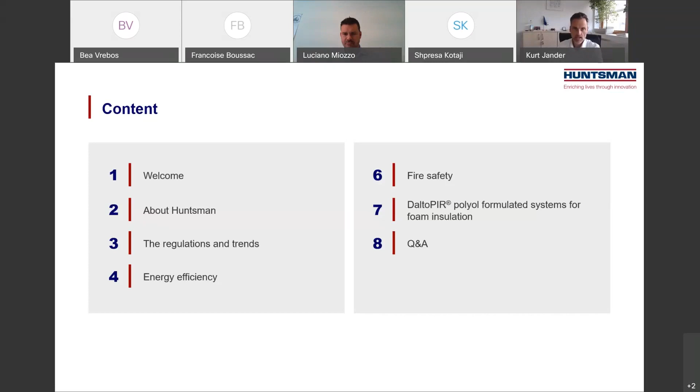Let's start with a brief introduction to Huntsman. Huntsman is an American company founded by Mr. John Huntsman about 50 years ago. Today, the Huntsman Corporation is a publicly traded global manufacturer and marketer of differentiated and specialty chemicals. Our products number in the thousands and are sold worldwide to manufacturers serving a broad and diverse range of consumer and industrial end markets.

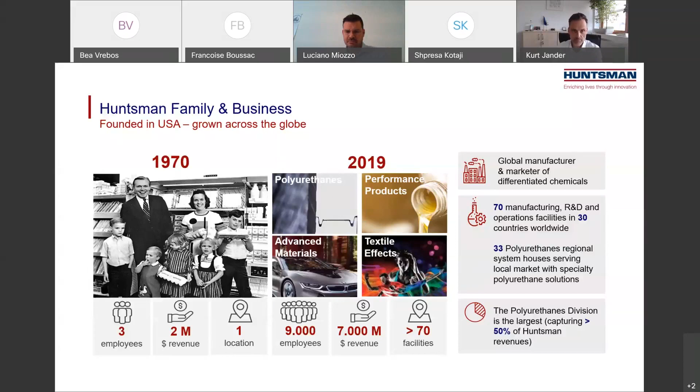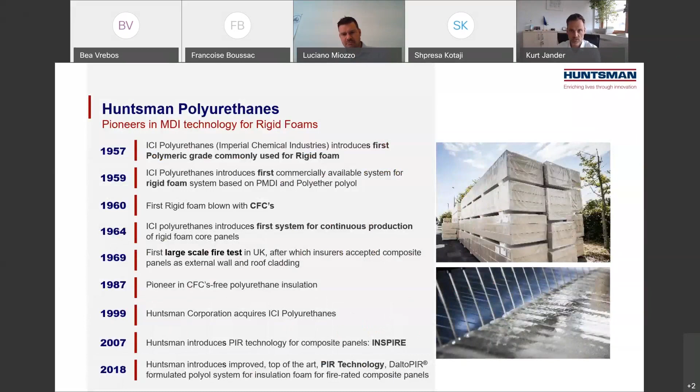ICI Polyurethanes, later acquired by Huntsman, was one of the first companies to introduce the technology used to produce rigid foam more than 60 years ago. We pioneered further with the right innovative blowing agents, and the first continuous system production was implemented. During the years, Huntsman continued to further develop the rigid continuous systems business and technology, both for fire properties, processing, as well as quality performance.

The objective of this webinar is twofold: to provide you with clear information and key trends in construction, in particular on energy efficiency and fire performance, and to support your growth in this complex environment. I now leave the floor to Diane Daems, Global Senior Fire Expert, who will tell you more about these key trends. Diane, over to you.

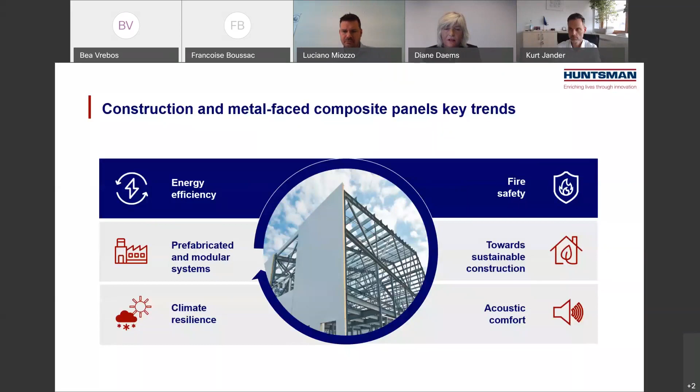Another key trend is the need to build with fire safety in mind. With the increasing use of insulation, preventing heat to escape, and the trend to build more densely to accommodate population growth, we need to make sure only adequate and safe building designs are promoted, and we will see how polyurethane composite panel performance can help. So, let's go in more detail on energy efficiency first.

Energy efficiency, why is it important? The timeline in this slide shows the milestones that have led to the growth of insulation demand. The trend towards very high energy efficiency in buildings started after the signature in 1997 already of the Kyoto Protocol, aimed at reducing the amount of greenhouse gases emitted by human activities. The European Union agreed to reduce our 1990 baseline emission level by 8% by 2012.

Secondly, in 2002, the European Union implemented its first version of the Energy Performance Building Directive, EPBD, that introduced the obligation to provide a building energy performance certificate and the obligation for member states to impose a minimum energy performance.

In 2010, the second revision of the Energy Performance Building Directive introduced the concept of nearly zero energy building, requiring member states to define the most optimal U-value per climate and per region, and the obligation for new public buildings to be nearly zero energy by end 2018, and for all new buildings by end 2020.

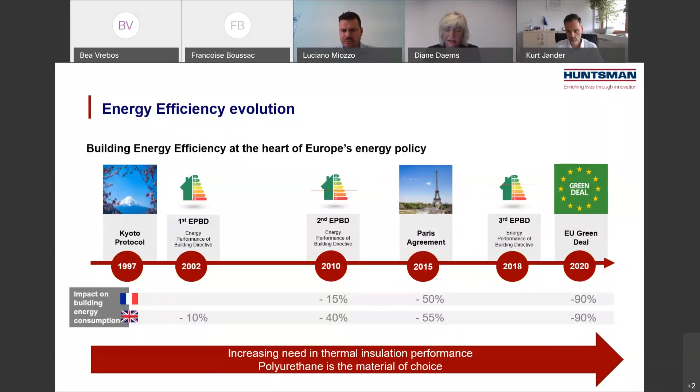The graphs here show the results to date of all these initiatives, both on the energy consumption as well as on the growth of insulation materials and PU insulation in particular. The building directive required improvements on the building energy efficiency to be implemented by the member states. The graph on the left shows the gradual reduction of building energy demand to achieve the nearly zero energy building requirement target by end of 2020 for all new buildings in three selected countries.

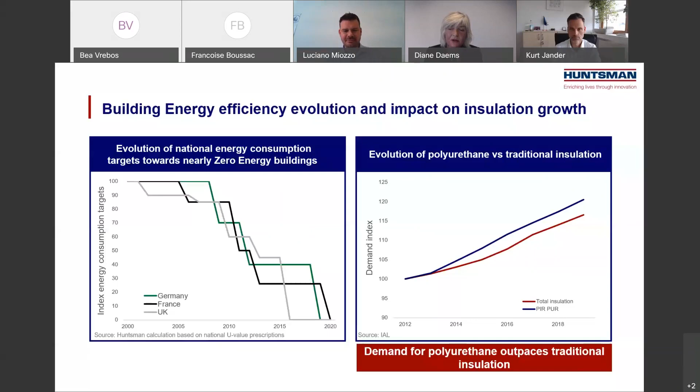On the right side, the graph shows that the reduction of building energy consumption was accompanied by an increase. A faster growth of PU insulation in general was seen, as shown by the blue line. This can be explained by the fact that due to its much lower thermal conductivity, or lambda value, compared to the conventional insulants, the same energy performance of the building could be achieved without significantly increasing the thickness of the insulation layer and therefore minimizing the need to adapt the construction detailing.

The lambda value of the chosen material has an impact on the thickness required to achieve a given U value. Here, when looking at the U value for roofs and walls in both these charts, as prescribed in Finland, Germany, Italy, for nearly zero energy performance, we can see the advantage that PU brings by almost halving the panel thickness. The white bar is PU with a lambda value of 0.022 compared to mineral wool, the brown bar with a lambda value of 0.041 watt per meter Kelvin.

For example, for roofs in the left graph, in Finland, where the U value requirement is 0.09, the required thickness is 76% higher for mineral wool than for PU. This in turn simplifies handling and eases the installation and fixing with the polyurethane panels.

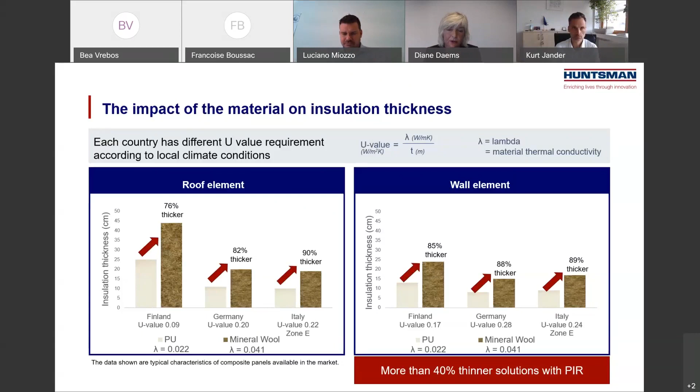So as a result, these thin, relatively lightweight composite panels can safely bridge wide spans. For example, a panel just 100 millimeters thick can easily bridge a clear span of some 6 meters, reducing the metallic structural element requirements. A study of PricewaterhouseCoopers showed that in a reference building of a standalone retail with a gross area of about 2,300 square meters, up to 10% less steel is required to support the roof and the walls. At the same time, the overall cost of the steel, panels, and insulation is also reduced by 10% when using PU.

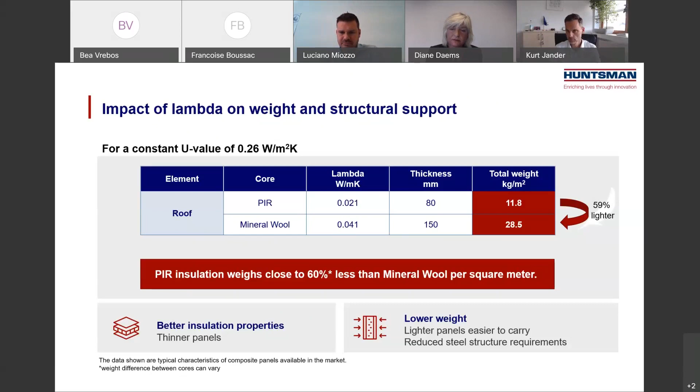Let's now go in more detail on fire regulations and requirements. And now here comes the poll question to you. So please use the panel on the right side to answer. I will read out the question. Which classifications can increase confidence with architects and designers to use new PIR composite panels with high fire-rated applications? Please tick all that apply. You have 20 seconds to answer, and then we will look at the results. So I wish you good luck with the answers, and in the meanwhile, I will continue with the introduction to the fire part.

Fire codes are an integral part of the national building codes, which are reviewed more regularly than historically to accommodate the changing building practices. And why are building practices changing more? This occurs because of several reasons, but the key one is the stepwise energy efficiency regulations and the move to a carbon neutral economy by 2050, which we showed before. The change in building and fire codes follows this timeline as well, but strong effects are expected to occur in the next 5 to 10 years in external wall and roof insulated building solutions as new standards and requirements appear in the European Union and in the member states.

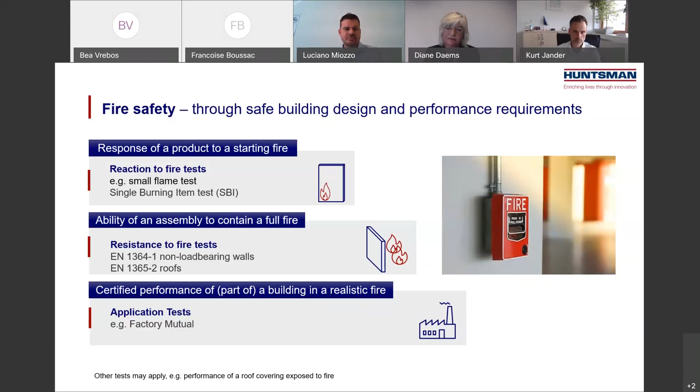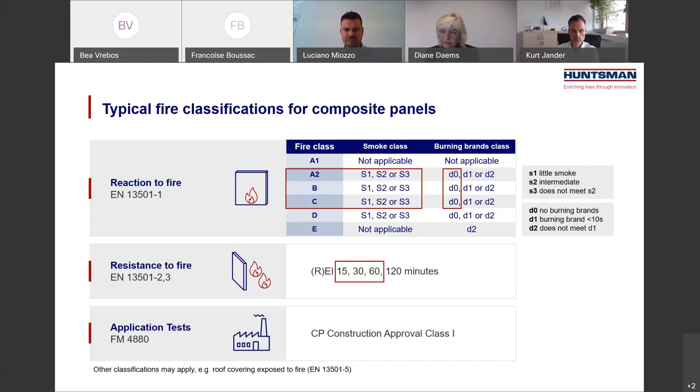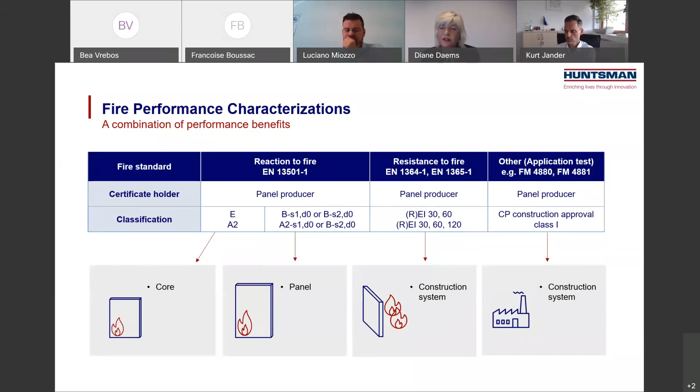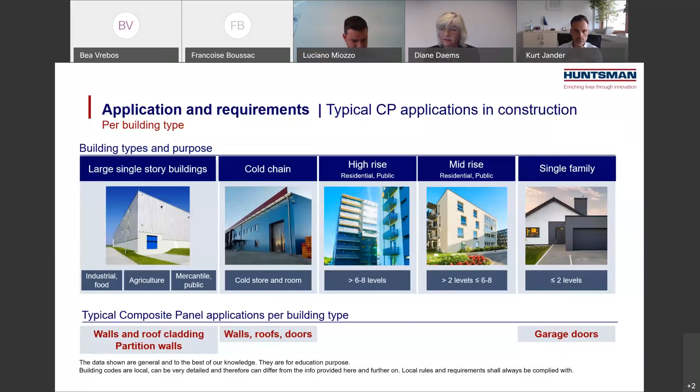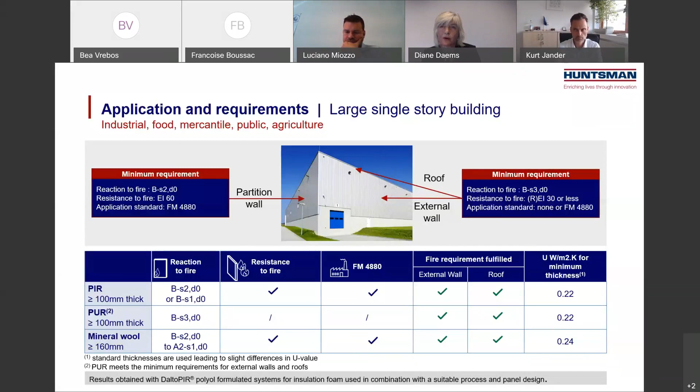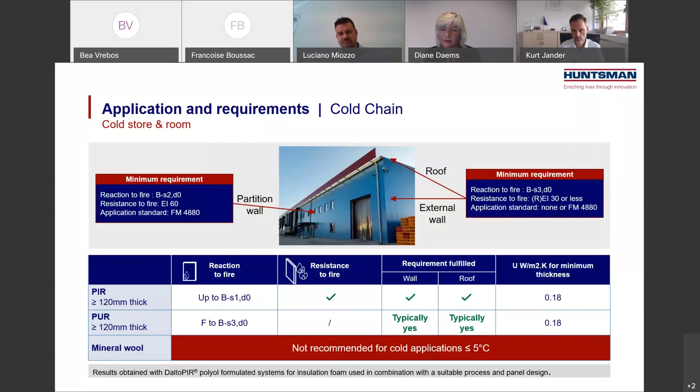Here ends the session on the trends in energy efficiency and fire safety. I will now hand over to Luciano, Platform Manager Insulation at Huntsman, for the final part of the presentation.

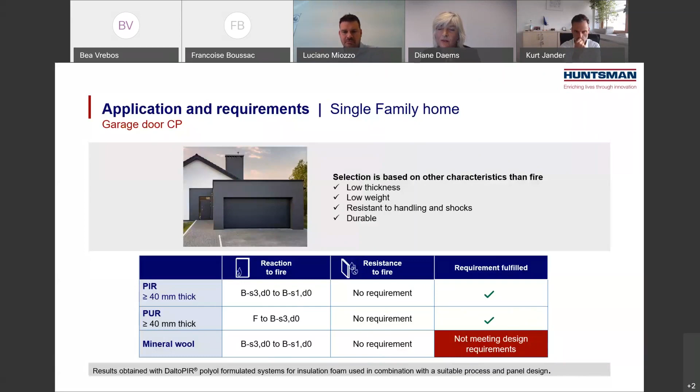So at Huntsman, because our aim is to contribute to the best solutions, we have developed a full range of solutions to meet the market needs. DaltoPUR and DaltoPIR are formulated polyol systems to produce a wide range of PUR- and PIR-based fire-rated foams, respectively, for composite panels. With a full range of products, we offer a solid solution for most requirements.

Our offer of DaltoPUR and DaltoPIR formulated polyol systems can cover the needs of composite panel producers for both non-fire-rated and fire-rated products. To achieve fire-rated composite panels, we developed over time several products, differentiated in terms of reaction to fire and fire resistance. Among all our formulated polyol systems, the one developed to produce PIR composite panels can help manufacturers to achieve the B classification for reaction to fire when combined with suitable process and panel design, which is the highest achievable classification with polyurethane-based products. The products are shown in this table here.

Starting from the left to the right, both DaltoPUR FR and DaltoPIR FR+ can enable our customers to produce fire-rated composite panels. Those formulations have been developed to work on laminators running at low temperature, namely 40 and 45 degrees Celsius, respectively. This temperature is identical or very close to the one used for PUR non-fire-rated composite panels. So the use of DaltoPUR FR and DaltoPIR FR+ can allow a faster switch from the production of non-fire-rated composite panels to the production of fire-rated composite panels. DaltoPUR FR can help manufacturers to achieve a minimum Cs3d0 classification for reaction to fire, as reported in the table.

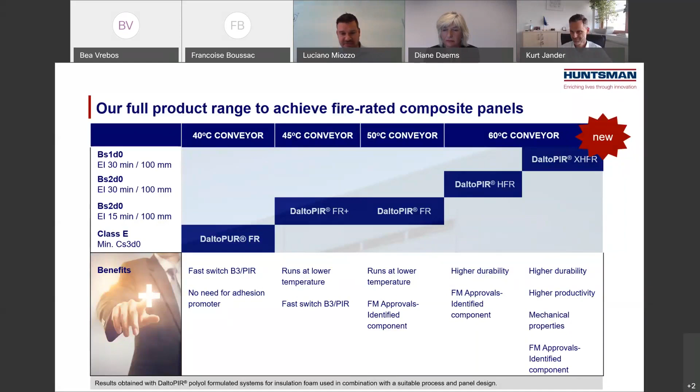So DaltoPIR formulated polyol systems for insulation foams have been optimized to help manufacturers to meet stringent international fire safety requirements and to satisfy the needs of composite panel producers, architects, and building promoters worldwide. Composite panels based on PIR technology combine, first, energy efficiency, second, lightweight, and third, ease of installation with fire safety performance.

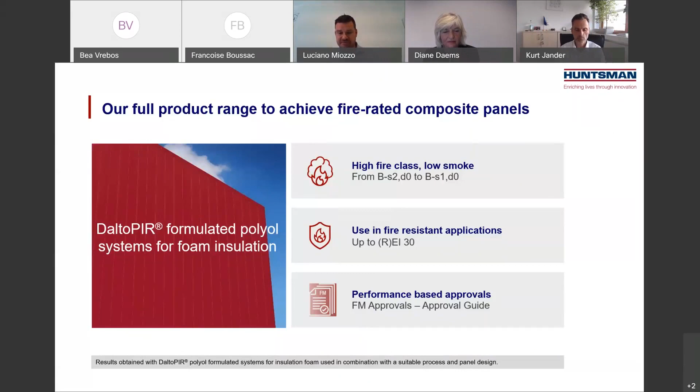Thank you, Luciano and Diane, for providing these great insights into this very important subject. With this, we all together will be able to fight fires, protecting properties, and most important, protecting people's lives. Now we are going to open the Q&A session. Our experts, Diane and Luciano, and of course myself, will be happy to hear and answer your questions.

Let's start with the first one, which is actually a question for Diane. Do you think that the COVID-19 crisis will have an impact on the insulation growth in Europe? Thank you. That's a good question. We have not dealt with that in the webinar, but we are all very much involved in this pandemic. It could go either way, negative or positive, but we believe that the crisis will have a positive impact.

Due to this pandemic, the European Commission will invest quite a lot of money. I think it's about 91 billion euros a year in massive building renovations. So on the basis of that, we think that the crisis will have a positive effect.